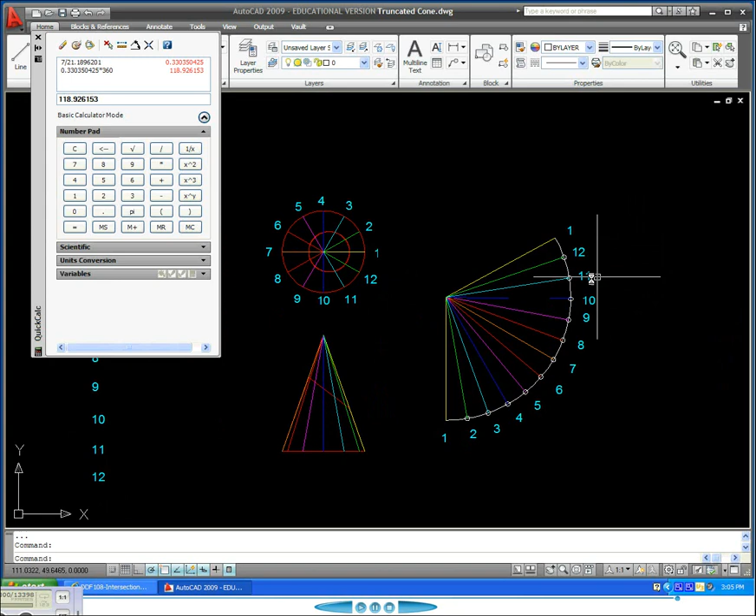Part 2 of the truncated cone video. If you haven't watched part 1, you definitely need to watch that before you try to pick up at this point. As you can tell, we've done quite a bit of groundwork trying to just get started doing the development.

On the right here you can see that we have our cone developed. The only part we have left is the part above the cutting plane. In other words, I want to subtract the part that's above the cutting plane from this object here, and you'll see more what I'm talking about in just a moment.

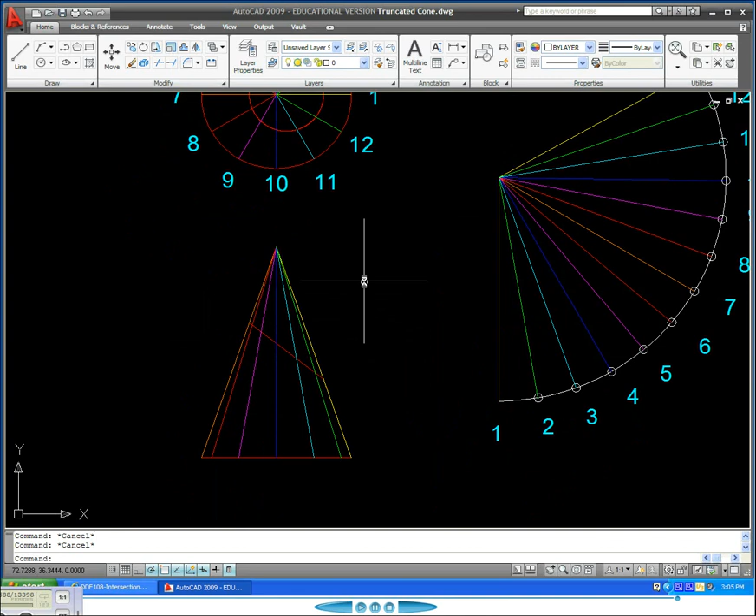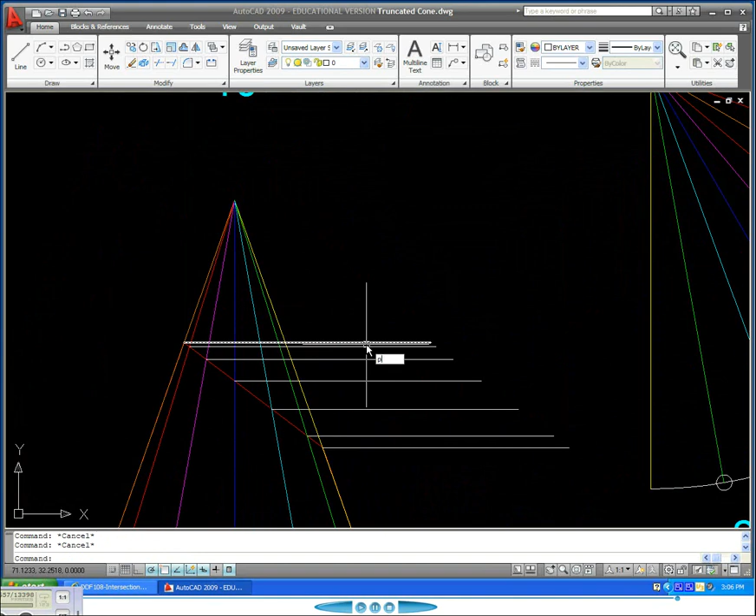But the next thing we need to do is draw a line from where this cutting plane intersects the lines that we drew. Okay, and I will copy that line just down to each intersection. And now we'll draw a line in space back toward the true length line. What I'm trying to do is draw a line perpendicular to the true length line.

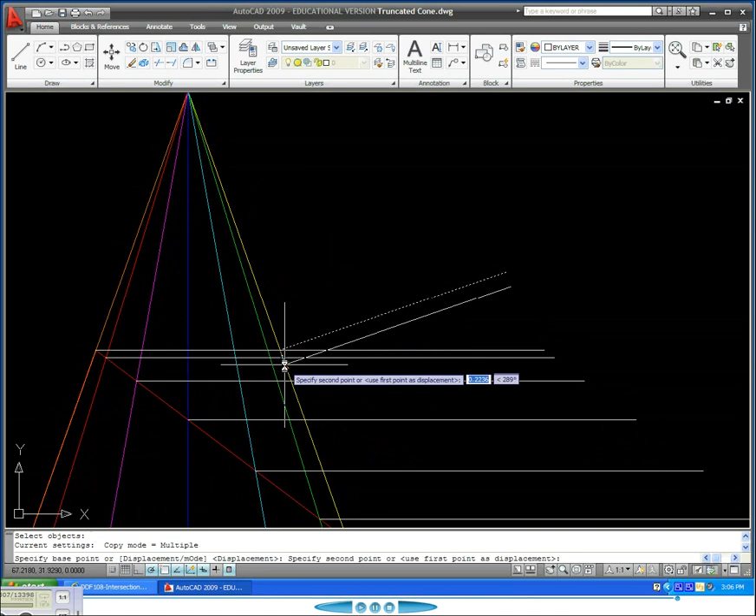So now that I've done that, I will snap to that intersection, and I want to copy this same line, and make sure that you use the exact same line, and also make sure that you snap correctly on the intersections. Okay, so now that I've done that, I need to clean it up a bit, trim off that excess.

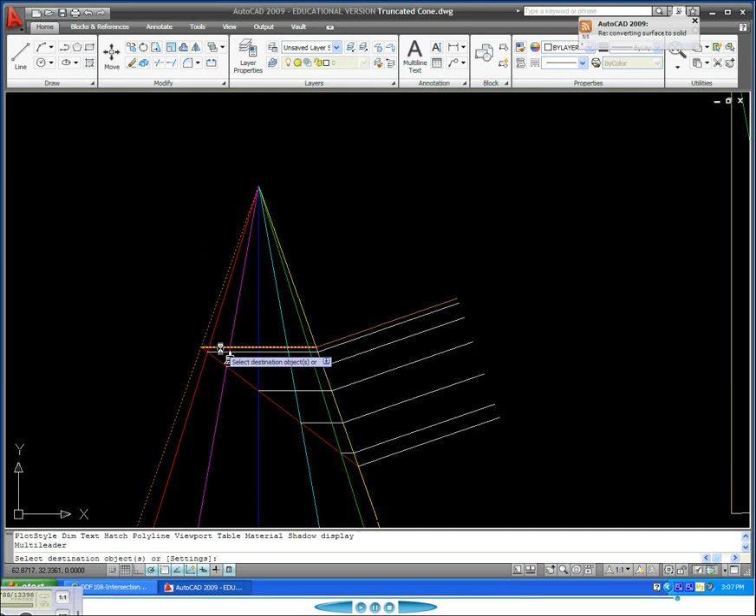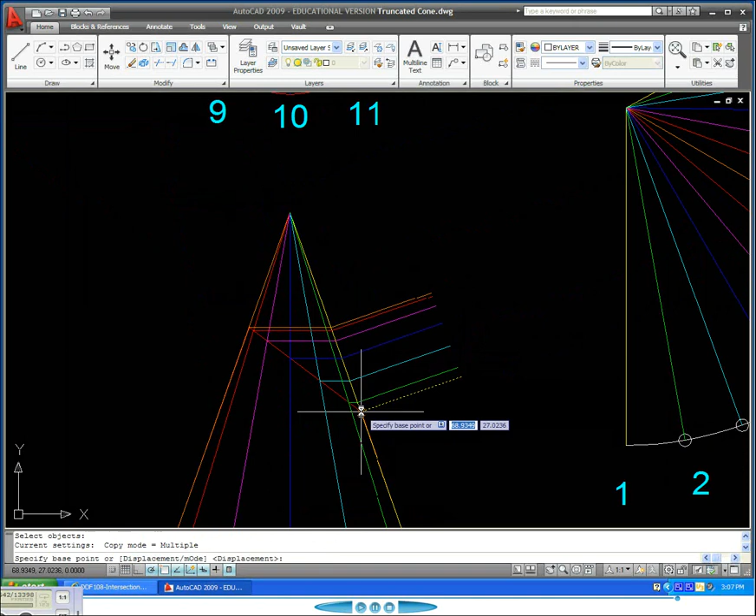Okay, so now, just to continue with the color matching, I'll make this line here orange, and I want this one to be red because it's intersecting the red lines. The same thing with the magenta. This one's going to be blue, cyan, green, and of course this last one will be yellow. And I will just copy that yellow line to the very top of my cone, just like that.

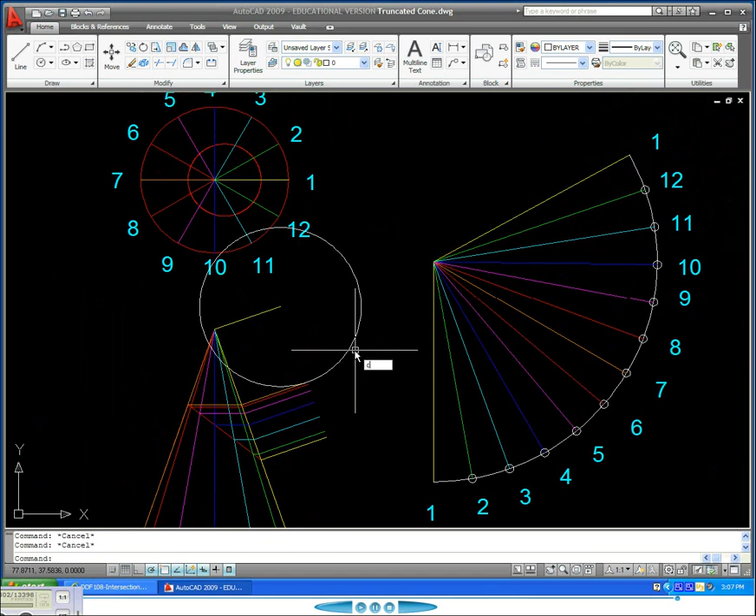Alright, now if all your snaps are in the correct position and you use the same line to copy around as I suggested, now all you have to do is draw some circles. So from the end point here to the end point of the orange line, I want to draw a circle. And I will copy that circle, or you can just move it. But we were working on the orange line, so I want to select the circle, and then trim the orange line that's in the circle.

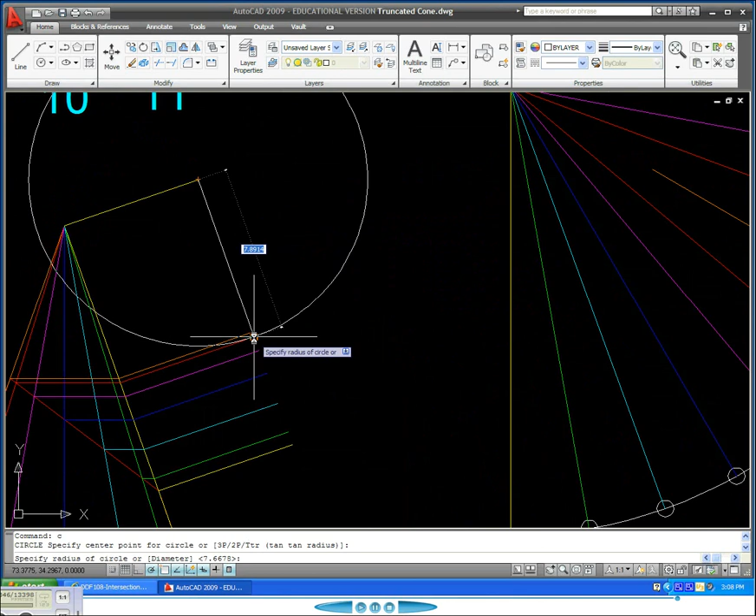Okay, now I want to work on the red, so I'll go back to this yellow line and go to the end point of the red line, and I will move or copy that circle to the center of our development. And now since I was working on the red, I will trim the red line here. Okay, and now we'll continue repeating this procedure. If you have a good idea of what I'm doing, you're free to end this video and work on your own development. If you want to see the finished product, give me just a few minutes and I will be done.

So now I want to do the dark blue. Cyan color. And the green. Okay. And finally the yellow.

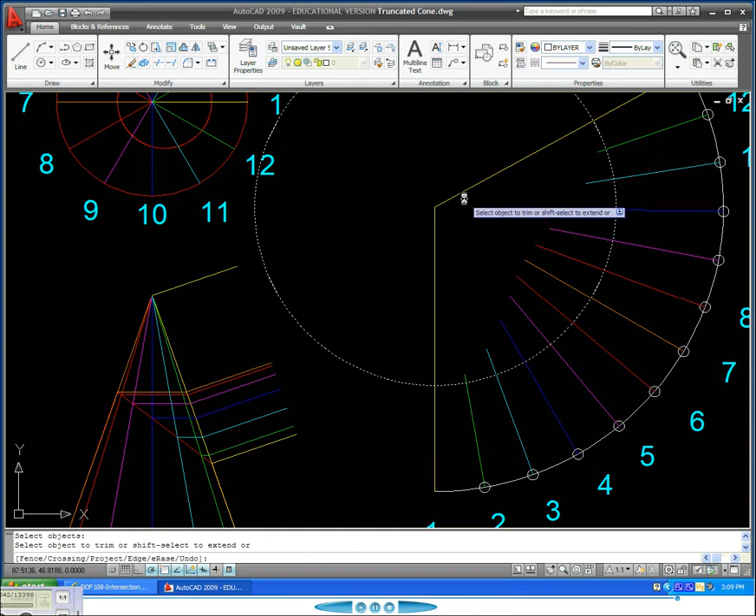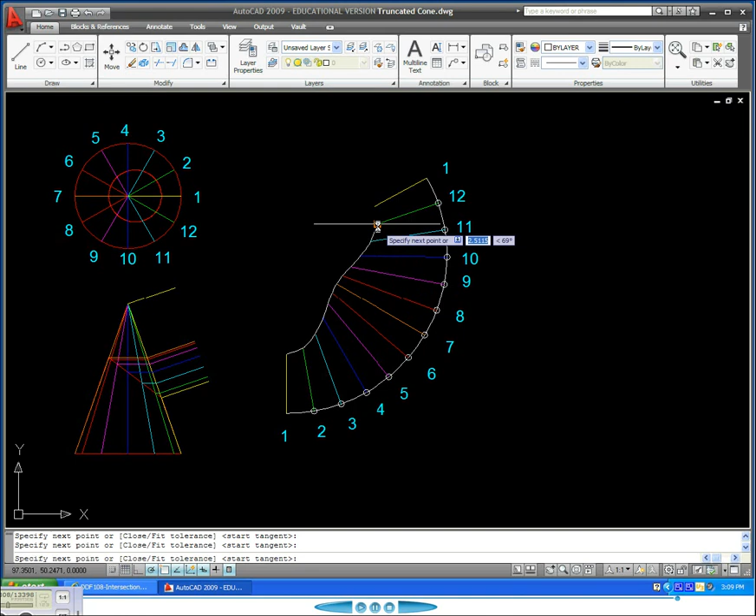Okay, so now the last step we need to do is type spline, and I will snap to each one of the endpoints. And then when I get done, I'll hit enter 3 times, 1, 2, 3, and you can see I now have a spline. This spline and your entire object in this case should be totally symmetrical, so you can see the vertices light up and there should be some indication if you drew it wrong right there on the spline.

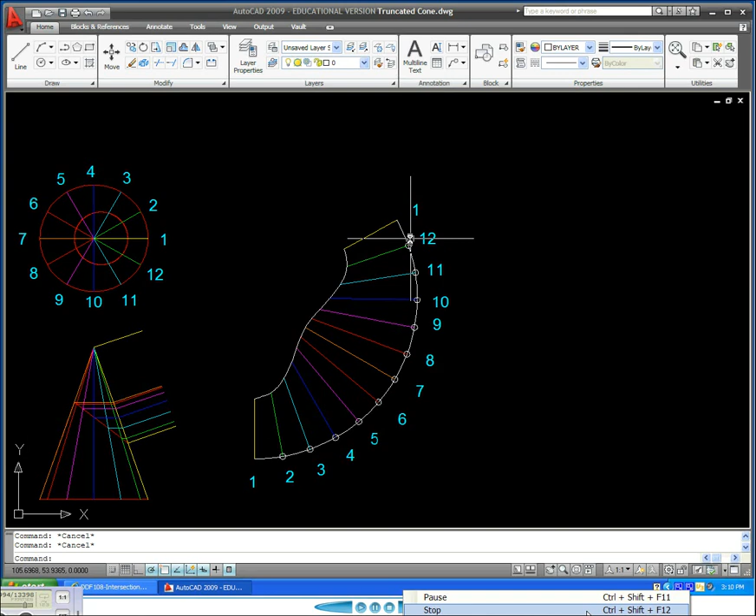But as far as the pattern development of a truncated cone, there you have it. The last thing you would want to do probably is to add a seam for taping, and also you may want to just change the outside of the cone into just an object rather than individual pieces. But this concludes part 2 of the truncated cone.